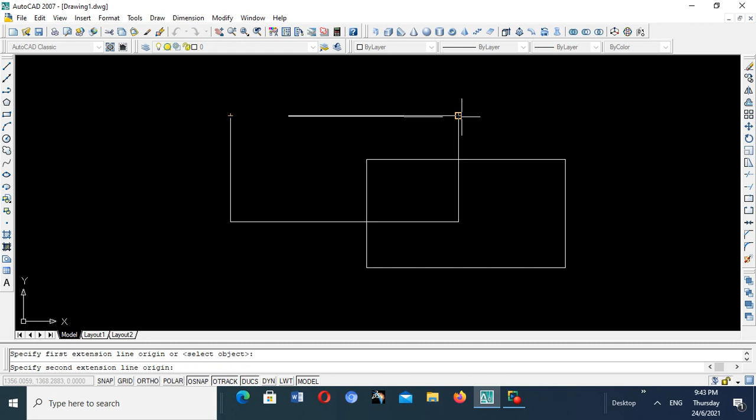When you are dimensioning, you pick this drop down menu and choose if you want to dimension a line. Go to its edges, click on linear, and click on the end of the line, two ends, and there is your dimension. See, it's very small.

Then if you want to dimension the height, go again on dimension linear, click on the end points of the line. There is your dimension. Very easy.

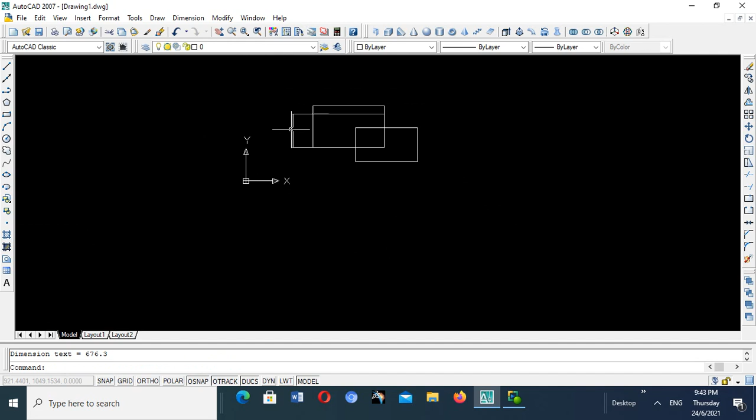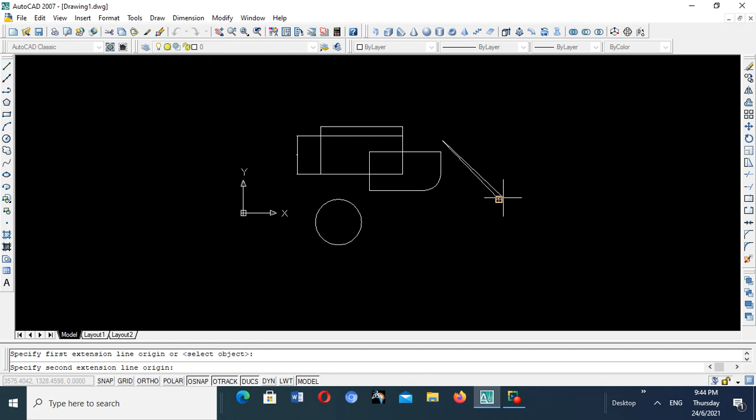So if you want to dimension a non-horizontal line which is inclined like this one, you go to dimension, click on aligned, and then click the end points of the aligned dimension. There is your dimension. See, you have to zoom it to see it, it's a bit small. There's something I want to teach you later.

If you want to dimension a circle, you go dimension. You can get its radius, you can get its diameter, you can get its radius. So click radius, and then click on the circle. There is your radius.

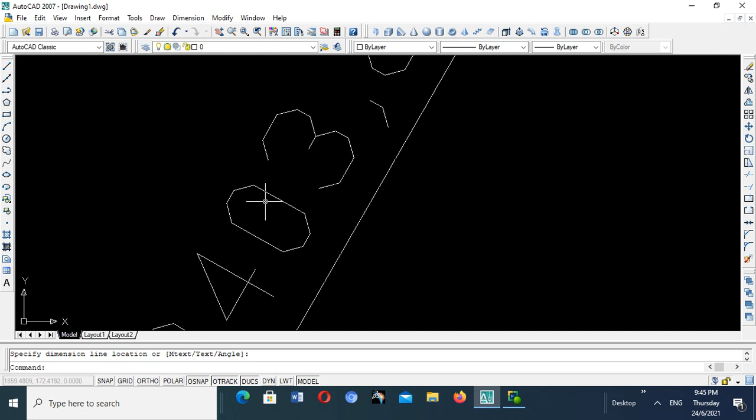You want to dimension the fillet radius. Again, you click radius. This is it. There is your radius, 300.

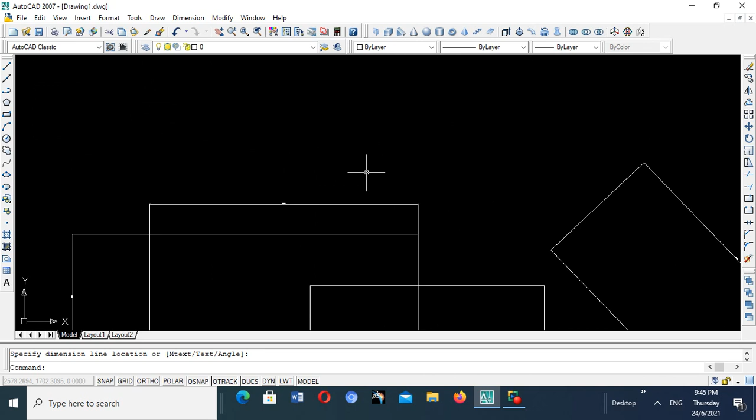Remember, we dimensioned 300. But now you might not be satisfied with this dimension, particularly the text might be too small, the arrowheads might not be visible, the extension lines at the edge might be too close. See, there's a distance. You want to increase the gap between the end point and the dimension end line.

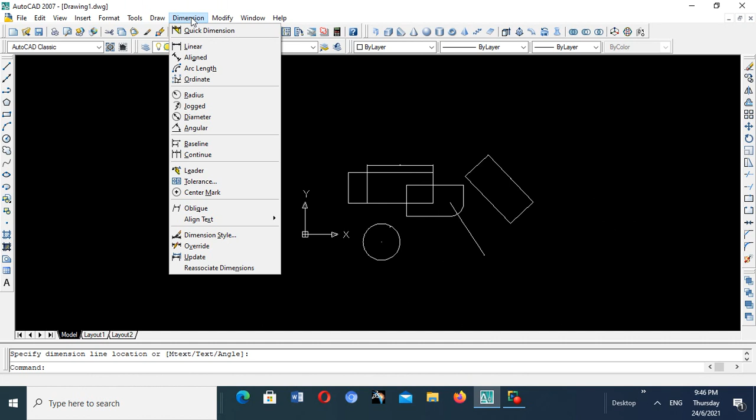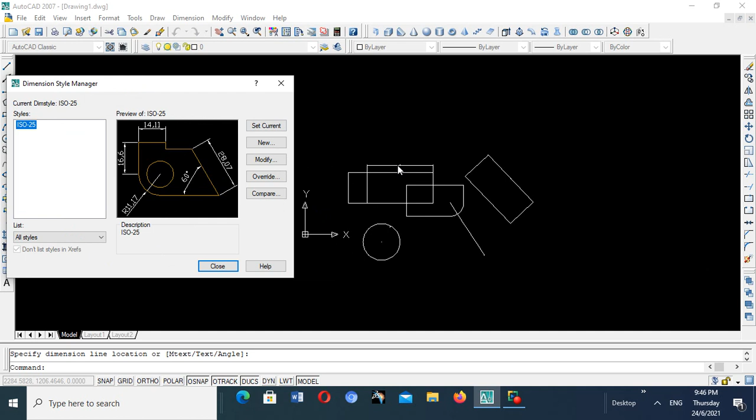So you go to modify, you go to dimension, and then you go to dimension style. Here you will see we will modify certain things like the size of the dimension, the size of the arrowhead, the different aspects of dimension, line thickness. We can modify it, and you will see after our modification that there will be a difference in the dimension parameters of our drawings. You check, you click on modify, then here you can modify line, arrows and symbols, text, fit, primary units, alternate unit, tolerances, right?

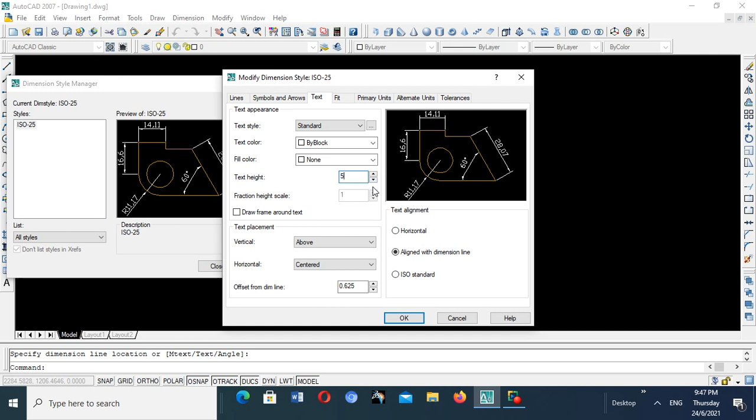I will give you one example, just like this text. So you put text height, I will exaggerate, I will put a text height of say 5 or even 8. If I say okay, and I say close, you see my text height is changed.

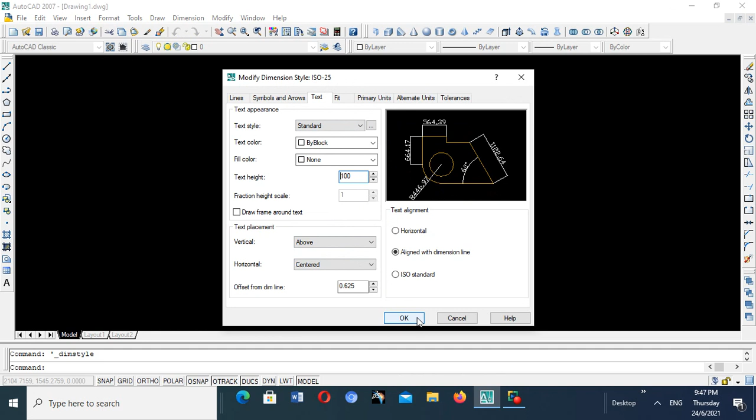Or let me put an extra dimension style. I go to modify, I go to text, I say for example 100, enter, and I say okay, and I say close. See my what? My text, my numbers, my dimension have increased in text height.

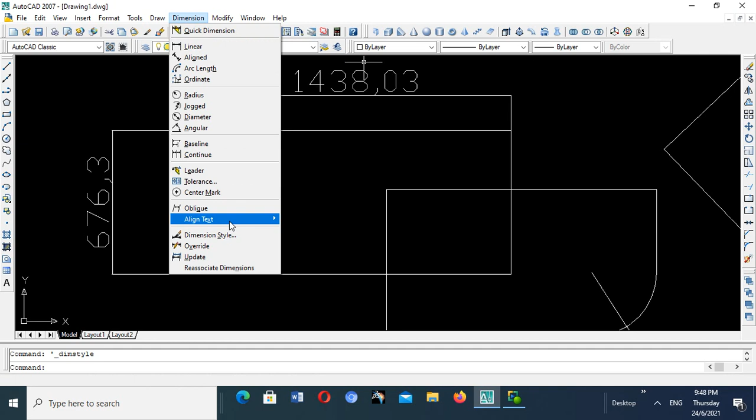I want to change the arrows. You see what will happen, the arrows. We go again to dimension style, we go to modify, we go to arrows and symbols. You can choose the type of arrow that you want. You choose, you see. So we choose the arrow which is that's the most used arrow. Then we change the size.

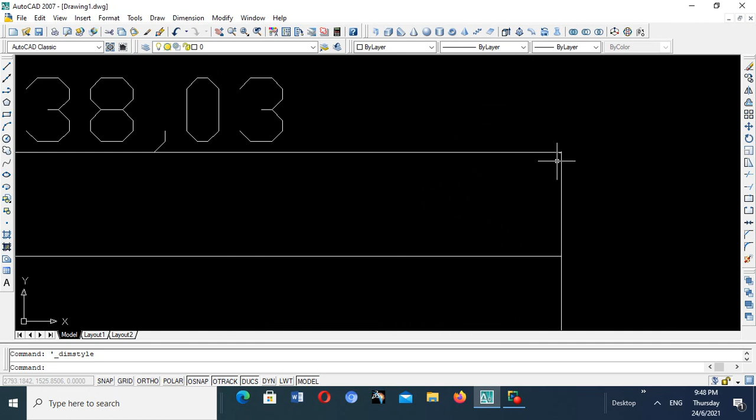Here is the size. Let us put 100 because of the size of our diagram, because of our limits. Our size is a bit on the larger side. Then you say okay, say close. My arrows are not yet visible. I can make them bigger.

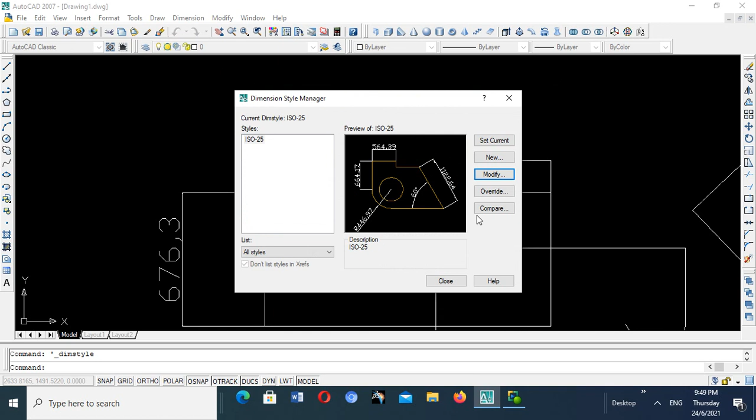Go to dimension style, I go to modify, and I go to center marks. No, I've gone wrong. Here is the arrow size, 100. Click OK. You will see there will be a big change. You see, there is my arrow size, it has changed. Why I was doing it one by one, because I want you to see the impact that it brings to your drawing by changing a certain parameter of the dimensioning style.

So we go dimension again, dimension style, modify, and you can change the text. I've shown you the text. You can change the line types, color of the lines. You can change most of these things. You don't want to change unnecessarily. You practice on them, you see their effect.

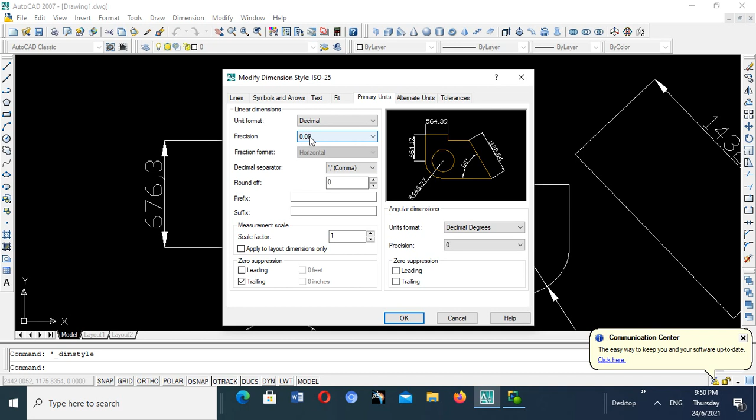Fit, right? And then you can go on primary units - this one you must know. Primary units, you see here the unit is 0.00. It goes to 2 decimal places. If you check in our drawing, it was going to 2. In our case, it is 1 decimal place.

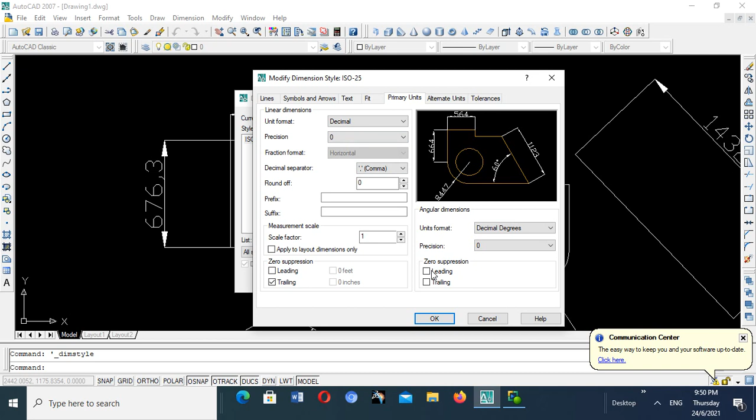We can make it 2 decimal places, or we can make it no decimal place. You see, the decimal place is removed. If you make it 5 decimal places, it will have more of this. So it depends on what you want. If you want 2 decimal places, it goes. If you don't want a decimal place, you go 0. And if you do that, it will automatically change.

Alternate units, tolerance. If you want your drawing to have tolerance, depending on the precision of the measurements. Some measurements operate within tolerance, but when you are going to machine dimensions associated with limits and fits, where high precision is required, it is given by some tolerance. Like if you're going to machine a bore where you fit a piston, the fit is critical and it is given a tolerance. So you define the tolerance, and you define the tolerance method.

It can be symmetrical, meaning the upper limit is equal to the lower limit. It can have a deviation, and then you state the upper limit. You say maybe 0.5 upper limit. Then you go to the lower limit, it goes to 0.002 as the lower limit, right? Depending on our primary units, that's why it's not going that low.

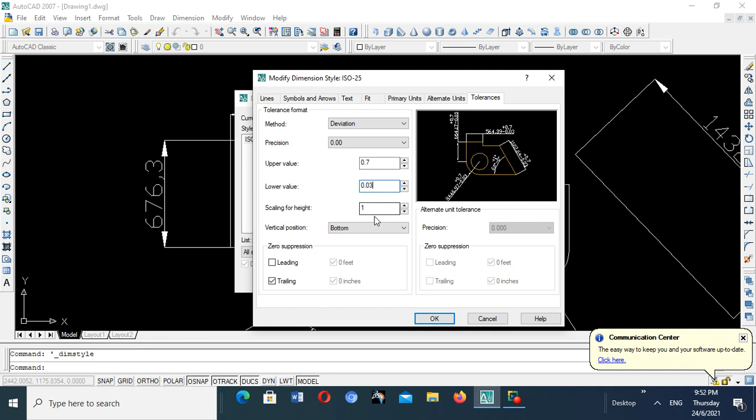So maybe let's go back to our primary units first, and we make them 2, and we go to our tolerance. Here we put 0.03, and the upper limit we make it 0.7. Check it, what happens. We go okay, close, check. It comes out with the limits, and the limit type is deviation, right?

Then you can also change dimension style, you modify. You can also change. There's something I wanted to show you.

On text. Good. If you want your text to be horizontal, it goes horizontal. If you want your text to be aligned, it is aligned. If you want your text to be ISO standard, it goes above. If you want your text placement to be above, it is like that. To be centered, like that. To be outside, it's like that. Right? Then offset from dimension - you want it to be offset from dimension by 18. It comes out to that.

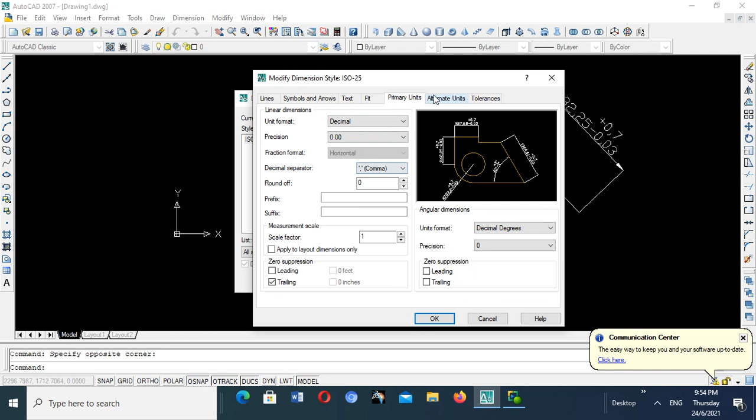Right? Then there's another interesting aspect of offset, right? Good. Then ISO standard horizontal aligned. Then there's the one primary units, we've discussed that. Alternate units, tolerances, arrows, lines.

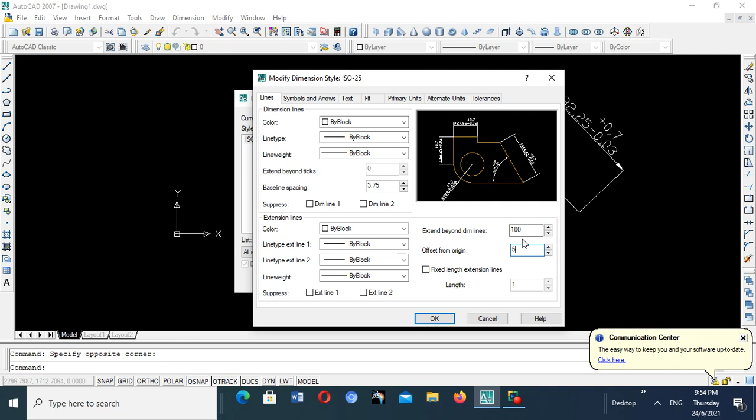Right, I wanted to go to this one. Extend beyond dimension line - see, if you change this one, you say 5. Change this one, you say again 6. Oh, you change this one, I'll make it exaggerated, you say 100. Extend this one, make it 5. See, offset from origin.

So this end of a line of a dimension, you are supposed to extend beyond. This 5 is a measurement from this edge point to that corner there. If we decrease it, you see it will come nearer. You see, right? This is offset from origin. Extend beyond dimension line - put 300, 400. You see, this is the magnitude of the extend line, and this is the distance of the extend line from the point of reference, right?

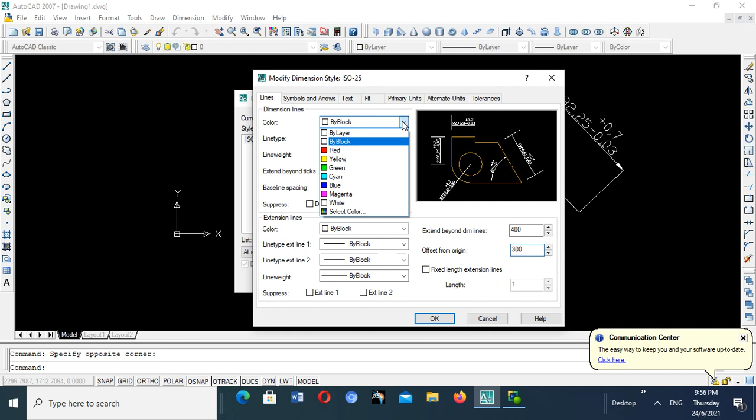Then what else do you do? Most of these things you go one by one, you practice them, you see their impact on your drawing. This is line weight. If you put this line weight, it will change your lines to line weight. It will be more clear on the printing.

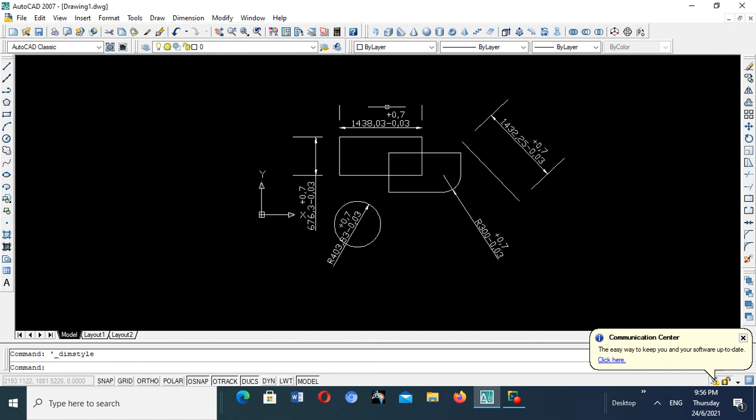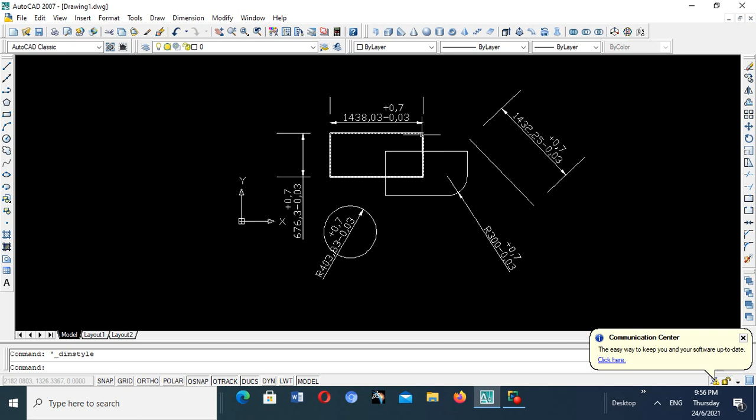So with this, we want you to practice how you can optimize your drawing by making sure you change the parameters that affect the sizes of your dimensions in terms of text height, arrowhead type, distance of this dim line from the end, and so forth. Then your diagram has more clarity and it meets the needs of your customer, or it meets the needs of your expected view of the diagram. Thank you very much for listening.